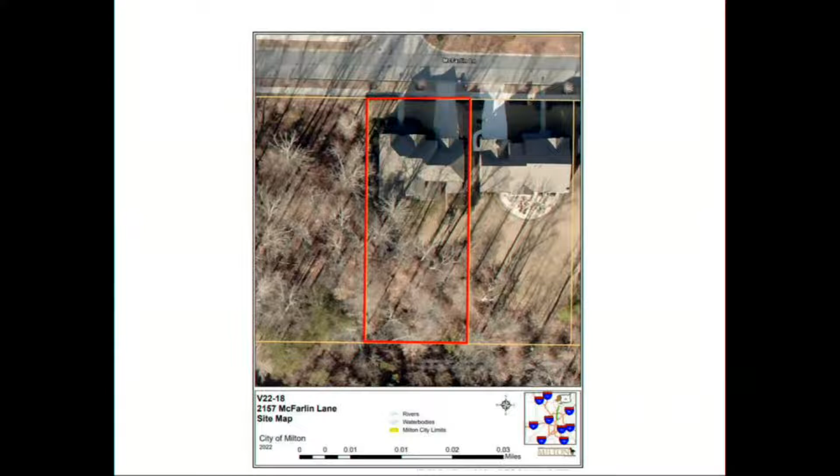The site is a 0.347 acre lot located in the Braeburn subdivision. The property is zoned T3 and is in the Crabapple form-based code. The Braeburn final plat, detailed in Exhibit A, shows a flowing stream in the southwestern corner of the property. A 50-foot city undisturbed buffer and 75-foot impervious setback apply to the stream as per section 20.42612. The applicant is proposing to build a pool that is encroaching the 75-foot impervious setback where impervious surface is prohibited.

Applicable T3 zoning setbacks for the lot are 15-foot front, 3-foot rear, and 5-foot side. The pool equipment distance requirement of 10 feet from the property line exceeds the current 5-foot side setback requirement in T3 zoning. So think of the pool setback as just universal: if you're in AG1, the 10 feet applies; if you're in T3, the 10 feet applies, even though the side setback is 5 feet.

The applicant met with staff on July 20th to discuss variance requests for the proposed pool and pool equipment location, as shown in Exhibit B.

The applicant is proposing to encroach the 75-foot impervious setback by 250 square feet, and the pool equipment is proposed to be 3.7 feet from the side property line, where the distance requirement is 10 feet. The applicant is proposing to locate the pool equipment flush with the existing HVAC equipment.

The site overall has a steep drop in grade towards the rear of the property, with a total drop of 22 feet. The original pool design was rectangular with an arc shape, with a total of 714 square feet of pool and 1,200 square feet of pool decking.

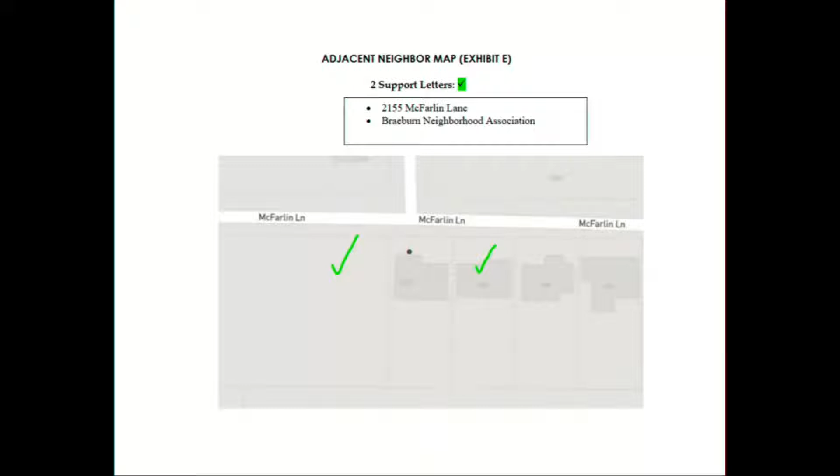Here are the letters of support, and from the Braeburn Neighborhood Association.

The DRB met on September 13th and had the following comments: DRB recommends approval of this variance request. If approved, staff recommends the following conditions, per the site plan from Survey Land Express Incorporated, received on August 1st, 2022 by the Community Development Department, and water quality treatment to be provided for all new impervious surface as determined by the city development engineer through the permitting process. Any questions for staff?

Can you confirm that the applicant complied with the requirements for proper posting of notice on their property in terms of the signage? Yes, staff visited the site and the sign was there.

On the site plan, I believe it was Exhibit C. Can you walk us through on the screen where the initial proposal was for the swimming pool and the pool deck, and then also show us the revision in terms of how they've narrowed that and made it smaller? Yeah, absolutely. So you can see the turquoise/green -- this is the original rectangle shape of the pool, and you can see it encroaches the 75 impervious setback much more, and it's also closer to the 50-foot undisturbed buffer. So what they did is they reduced the size of the pool and arced it to match the 75-foot impervious setback.

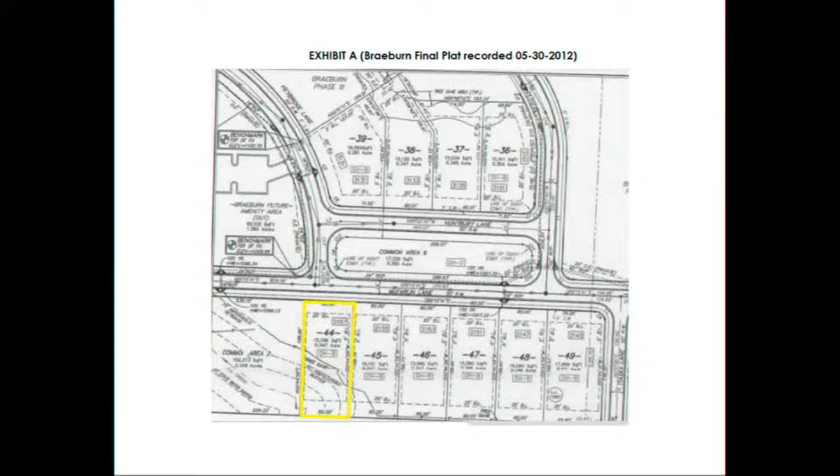Any additional questions for staff? Can you go back to the arced pool picture? Was it the city that said to put the arc in there, or is that a design that they wanted? That was John's and Lisa's idea, but we recommended reducing the encroachment as much as possible, and they came up with that creative design. The DRB was fond of the design, but I didn't know if that was worthy to put in the packet, if they liked the arc.

One last question for you. What was the net difference from their first plan to their second plan in terms of reducing the impact into the 75-foot impervious setback? Yeah, they didn't provide that calculation. They just gave the overall reductions. I'm not sure if John could provide that.

But I can give you the pool reduction size if you'd like. Yeah, if you have that. So for the rectangular pool design, it was 714 square feet of pool and 1,200 square feet of decking. And they reduced it to 589 square feet of pool and 801 square feet of decking. So respectively, 125 square feet reduction in the pool and 399 square feet reduction in the decking. About 525 square feet in total.

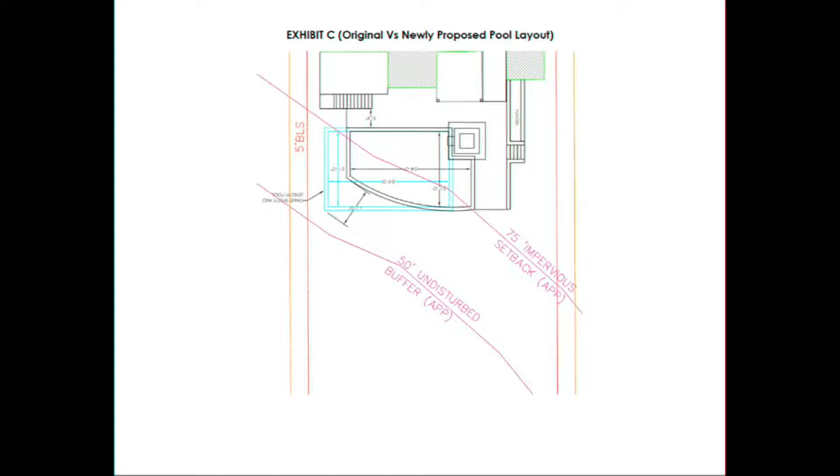You might see from the plan that if we put it to the back, it would be in the impervious section. If we do it to the right, it doesn't impact one neighbor we have on that side, which the heating and air conditioning is on that side anyway. And so the neighbor wouldn't have to see it. On our lot, it kind of goes down a little bit of an embankment to see into the backyard.

So you can't see it from the street, but we'll be planting oak leaf hydrangeas to cover that. So it will be camouflaged really well, even though no one would see it. You barely can see it from the street because of the hill it goes down. But also there's no neighbor on that side.

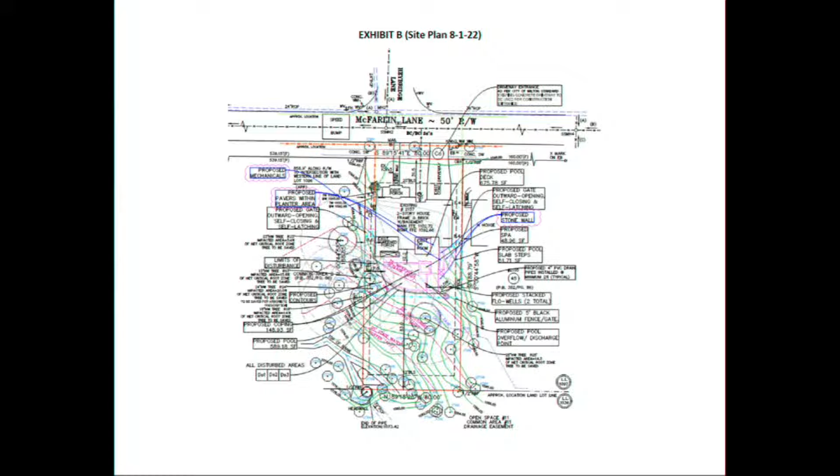The side of our property is only 8.5, or 8.6, feet wide to begin with. So that's the reason we need the variance. The lot's not wide enough, it's not 10 feet wide already, as you know. So it would be right next to the heating and air conditioning. There's no other place we could put it without infringing on a neighbor or the impervious setback.

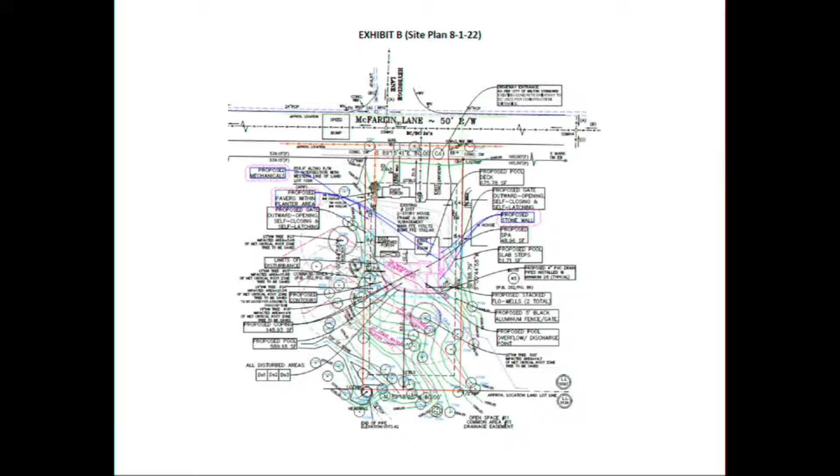So that side is the perfect side for not bothering the neighborhood or our neighbor. There's 500 feet of woods, and as Michael pointed out, it's really not buildable, it's just a deep gully with a creek and swamp essentially at the bottom.

So it sounds like the location you selected for the pool equipment is least impactful to your adjacent neighbor, versus the common area space on the other side where you could locate it. Yes, that's what we believe. And we're so close to our other neighbor, it would really impact them in a negative way if it was on the other side.

Any other questions for the applicant? One question: how old is the house and when did you move in? The house was built in 2012, so it's 10 years old, and we moved in almost exactly 2 years ago, September 2020. Okay, thank you.

I've got one question for you. Are you happy with the arc? Yes, actually we are. I would rather have the rectangle, I would rather have decking all around it, but I do realize the predicament we're in. So we felt like that was a fair design, but I would prefer the rectangle.

And that was one of the suggestions that the city made in trying to do the shifting of pervious and impervious surfaces. That was one of the solutions as to how to accomplish that.

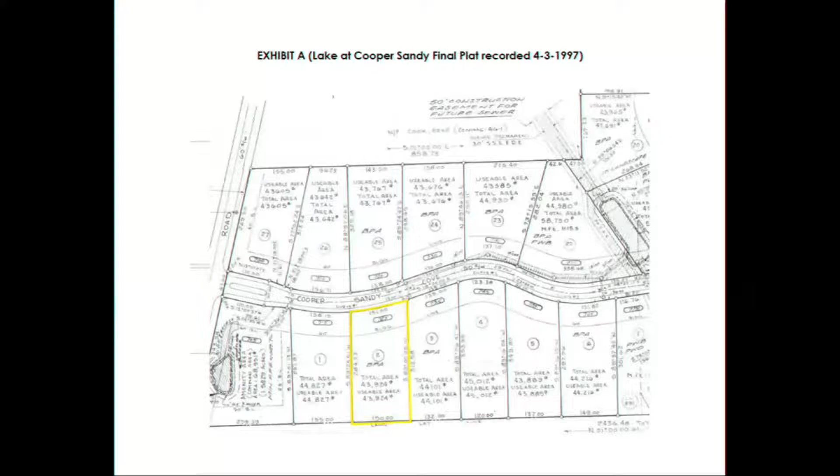The applicant met with city staff on July 19th to discuss the lot coverage variance request for the proposed pool and pool decking as shown in Exhibit B. The applicant was also agreeable to water quality treatment for all new impervious surface through the permitting process.

The applicant is proposing to reduce the existing lot coverage by removing 1,000 square feet of existing driveway. The total square footage for the proposed pool and pool decking is 992 square feet. When you include the 1,000 square feet of driveway to be removed, this is an overall reduction of 8 square feet on site.

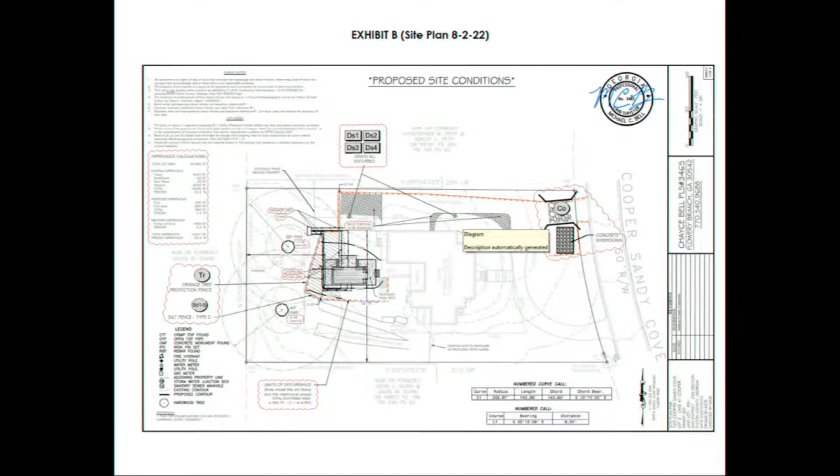If you just approve with the site plan as a condition, they will have to come back again to modify the condition. So instead, if you just stick to the removal of 1,000 square feet, that would give them flexibility as to wherever they want to remove it from.

All right, any questions for staff? I do.

So we typically approve per the site plan, so we've got a record that we can go back to and verify. Is staff asking for the recommendation to just be set at 1,000 square feet, to be determined later in terms of where that's going to be removed from? Because that seems a little more vague than just allowing them.

It is vague, but we can make sure that they are removing 1,000 square feet when they come back for the permitting process. But if you condition it to the site plan, it becomes difficult to change because we have to stick to the site plan. Right now, the site plan is showing the curve and a rectangle and everything, right? Yeah, correct.

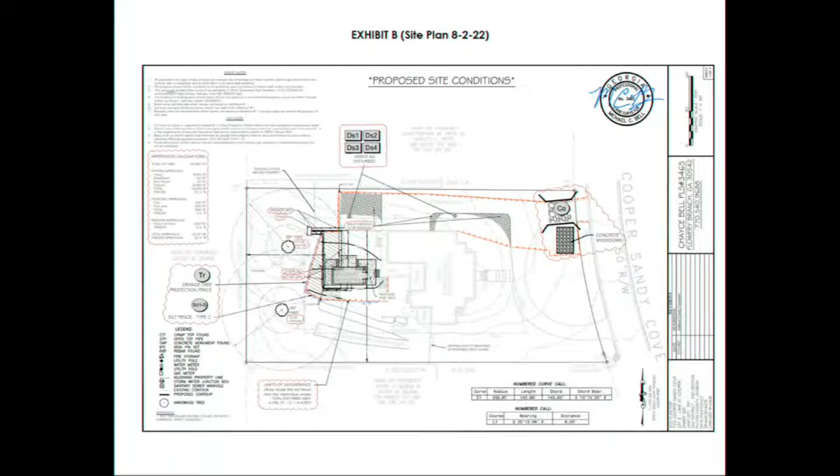We're just trying to be more lenient to the applicant. Michael, can you bring up the site plan? I'm trying to see. It's going to be... Can you zoom in on that at all or not? Let's see.

Okay, so there are two large trees on that site plan. Can you walk us through what the shaded area represents? It's the diagonal shading area. Look at the tree - this is the tree root zone, which is 1.5 feet from the edge of the tree, just a circumference. This area right here that's dashed is encroaching it, and it's noted on the site plan.

The maximum encroachment is 25%, and both of these trees are under that requirement - one at 17.6% and this one at 8.4%.

And you said the maximum encroachment was 25%? Correct. Okay.

How many square feet of concrete would it take to get to 20% removed? That'd be quite a lot, because their garage is right here, which would need a driveway all the way up there. So the excess driveway that they have is the second one that makes them exit the circle - that's all extra, really.

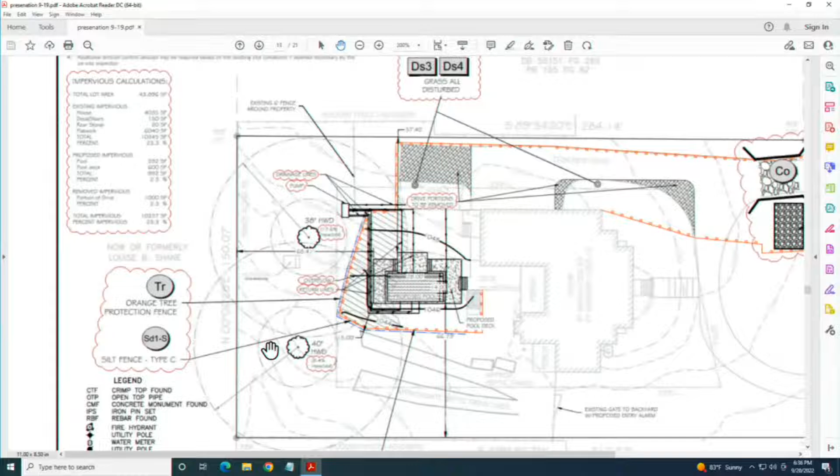So 1,000 square feet is 2.3%. So to get down an additional 3.3%, would that be 1,500? To get from 23.3% down to 20%.

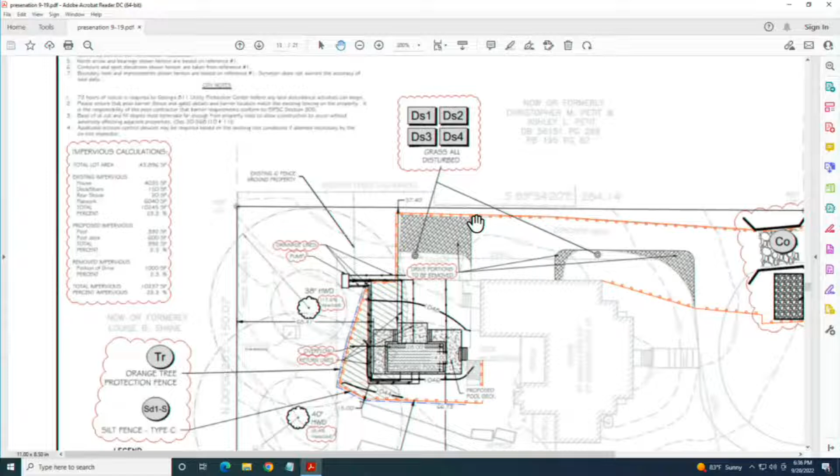Can you show in this diagram where we think we're going? As far as that goes - I talked to the applicant yesterday, and he couldn't be here because of COVID, so he's watching on YouTube. But from our discussion, he just wanted to expand the rectangle more and not remove any of the curve, due to the difficulty of removing curved concrete.

Maybe Lorraine can expand a little bit more on that, and the condition.

I guess the other question I have is, why are we talking about water treatment here? We don't have any 75-foot requirement here or anything, so why are we talking about water treatment?

Because you're over the 20% maximum, anything going over, we're going to hit you with water quality for that amount. It's exceeding the impervious area, so we're trying to make sure the stormwater gets treated before it leaves the site. That's the reason we have that flow well.

Okay, is the requirement though a lot coverage requirement - it doesn't necessarily have to do with impervious space, does it? Yeah, lot coverage is impervious. We're calculating impervious surfaces on the site. That's equal to lot coverage.

Okay, I thought there were other reasons for that 20% requirement. No, 20% lot coverage means we can actually have 20% of impervious surfaces on that particular lot.

So this lot is 43,896 square feet. 20% of that is 8,779. So if they want to go back to 20%, they have to get their total, including proposed, down to 8,779 square feet.

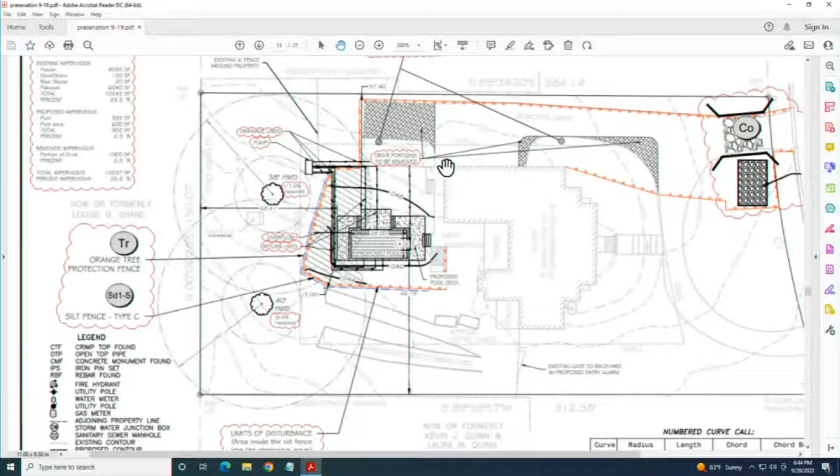Has the city gone and looked at whether, if they do go up to the garage, that accounts for the 1,000 square feet, or is that just anticipated? That's something they will calculate - we can't just figure it out looking at this. I understand, but I don't want to give them a variance for 1,000 square feet and then have them end up unable to do it because it cuts into the garage. So we're just at 750 now, but correct me if I'm wrong.

I believe that once we go through the permitting process, you guys will be reviewing the site plans, and the new site plans will be showing the 1,000 square feet removed. We'd want the calculations on the actual pool permit detailing the 1,000 square feet removed, so it's on record through the permit process. But the county wouldn't approve our permit unless we can show on the site plans that we're removing that 1,000 square feet.

Could you point out, is this all new decking? I see the proposed pool, and next to it, is that all decking or new decking, and what is the decking? It's new deck, but the deck is only 600 square feet. The space to the left of the pool, the other side where you're pointing, and up a little more, the next block up to the left of that, what is that right there?

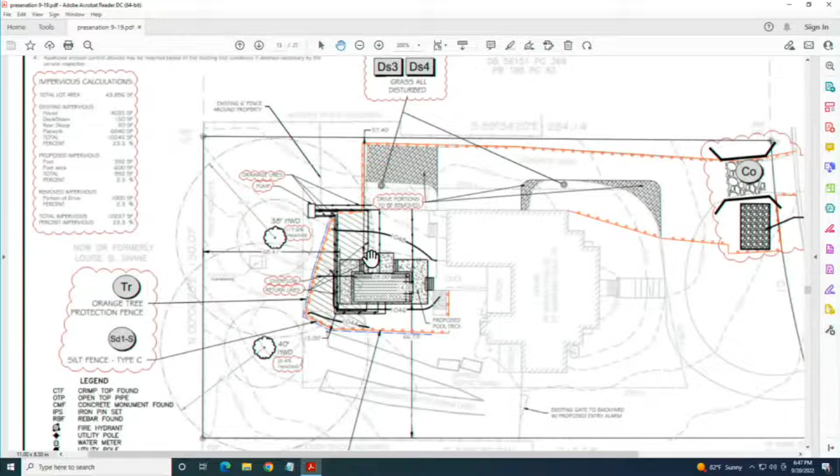These right here are lines from the pool, so return lines and suction lines, because the pool equipment is right here. And the opposite side of that rectangle, to the right, up, yeah, that vertical line right there, what does that represent? These are also lines, could be return lines, and these are lights, so pool lights. So everything goes right here - the pool equipment, the sub panel, all electrical, everything is in this area. So all these lines are either return lines, suction lines, or light conduits.

Those are all underground, right? Yes, all underground, except for the pool equipment. I couldn't make out if that was some kind of decking or structure, it kind of got blurry in there. Okay, thank you.

So when you got neighbor approval, did they look at the site plan? What schematic or diagram did they look at? I don't know if they looked at the site plans. The homeowner talked to his neighbors, and I would say he showed them the design, which kind of shows where all the pool stuff is and the size, but I don't know exactly what they saw. Okay, so that's an unknown.

I will say, if I'm not mistaken, both properties on both sides already have pools, and the one across as well. This neighborhood - almost every property in it already has a pool.

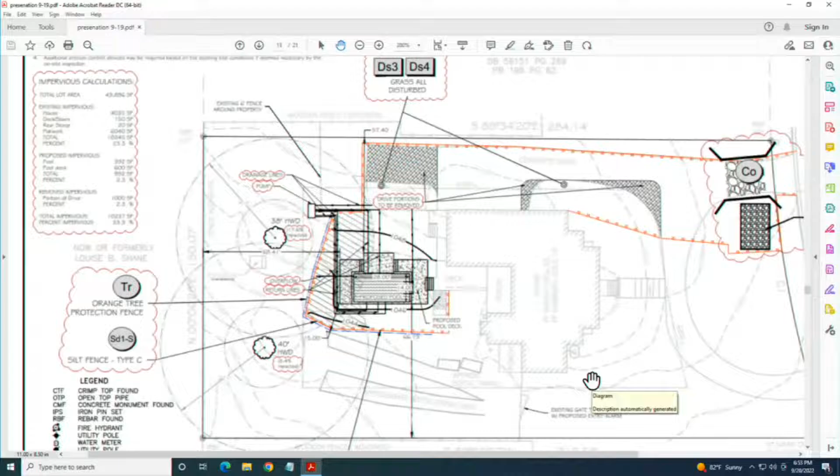So we'd still have, I guess, this variance. Potentially, but we don't know what the exact numbers are. Well, if it ends up being deferred and you're coming back, you could look at all these possibilities, right?

Okay, any other questions? I do have one more question. So the impervious areas we're talking about, the 23+%, are there flow wells that are going to be included to control where the water is being diverted? As Michael stated, when we go through permitting, any amount of flow wells they ask for will be installed. Once engineers see all that and tell us we need 2 or 3, then we'll install as many as they need.

Do you have any other questions for them? I don't have any more questions. So are you open to a deferral of the case? We were hoping not to have to wait another month, but ultimately, okay, it's...

Michael, can I ask a question? So the site plan, we condition these variances to the site plan. Can you just revisit why we do that? Yeah, so when we go through the permitting process, we'll match up the site plan to make sure everything is exactly the same, which was approved, and to make sure nothing gets missed. And so it's on record.